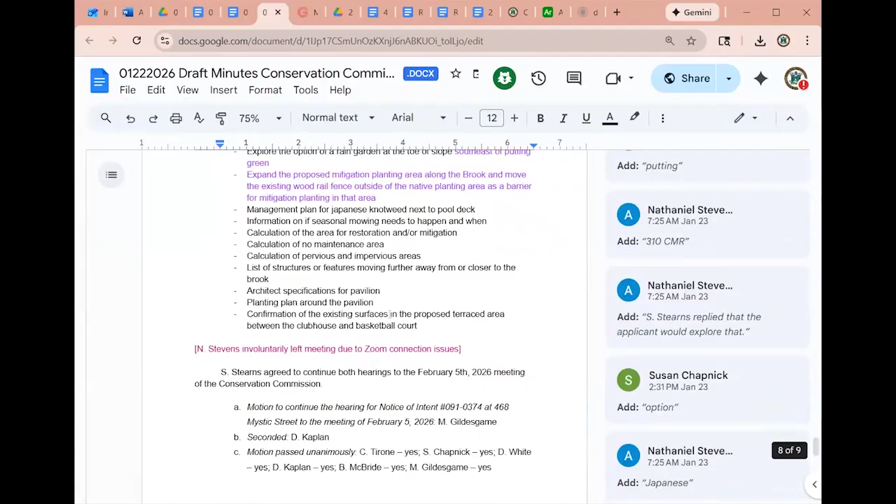And Jackie, if you could scroll back up, because I did have some comments. Were they addressed? Yeah, I know there was one question for Chuck. Let me see if I can find it. I didn't want to kind of go through the whole thing if we had a question that wasn't answered. I think it was near the front. Yeah, where did that go? It's near the beginning. There it is. Oh, ask Chuck. Whoops. Oh, if he is okay with his wording, I'm not sure this is what he said.

I was concerned with the word comfortable, but I mean, if you're okay with that paragraph, I'm fine, Chuck. This was relaying what you said about your conversation with Fish and Wildlife. Yeah. I think comfortable is fine. Okay, yeah, no problem. Right.

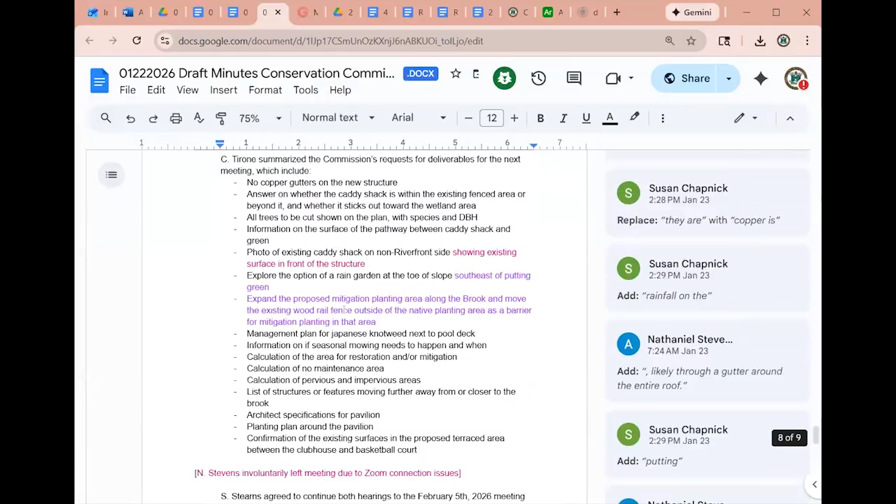So a few changes to the hearings, this paragraph in particular, more details. Then a few additions to this list. And that's it.

Did anyone have any additional comments? So wanted to say thank you to Nathaniel and Susan for all that extra time they've been spending. Appreciate that. Thanks, Dave. Indeed.

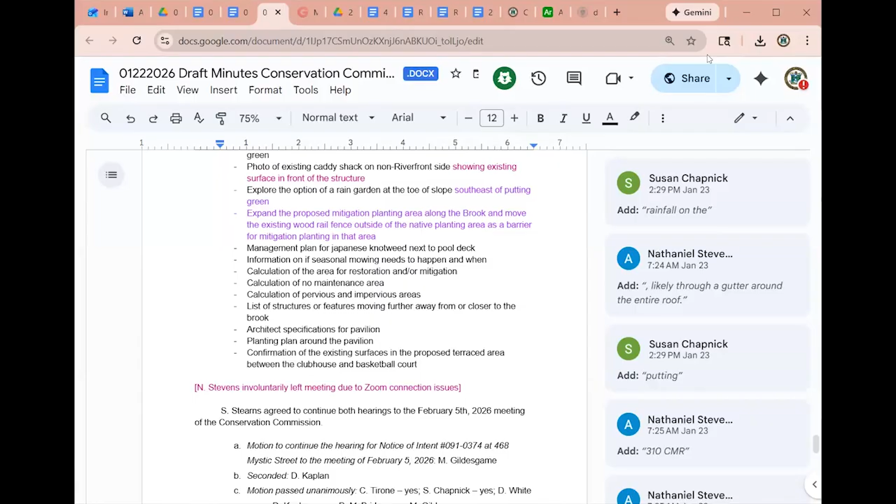All right, so with that, any further comments or motions on the minutes of the 22nd? Motion to accept as amended. Second, Dave Kaplan and Nathaniel Stevens. Mike Gildesgame, yes. Susan Chapnick, yes. David White, yes. Brian McBride, yes. Nathaniel Stevens, yes. David Kaplan, yes. And Chuck Tirone says yes. All right.

So correspondence is available. You can reach out to David Morgan at the office, or you can look at the Conservation Commission link, and we have correspondence there. If you have any issues with that, get in touch with the office, and David will walk you through the correspondence.

So first on the discussion is the vote for chair and vice chair. This is a 2-year term, and it's been me and Susan switching roles here, and we're comfortable extending that for an additional 2 years. But I think then at that point, we would like to, I'm speaking for Susan, but I'm going to say I would like to, hopefully someone else would be able to step in one of these positions so we could roll along.

And typically what ends up happening is we want Susan's position, the vice chair, to be the one that someone steps into, so they have those 2 years of vice chairmanship to kind of get acquainted with the additional duties. So, Susan, do you have anything to say about this?

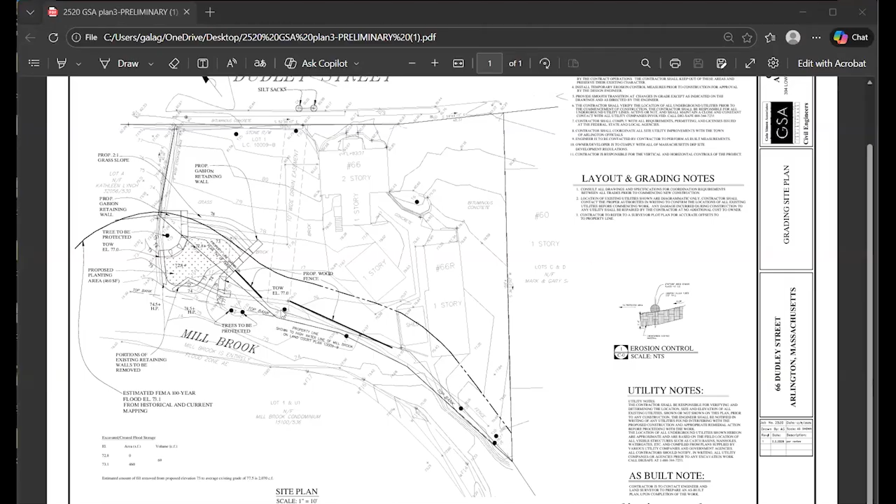One thing I wanted to point out — that dot where your cursor is at the end of the easement, that's a tree that the owners planted, right? I think that's the location. I remember they have it, it is a tree. It's a small tree, yes, it's a 7-inch diameter. There's a name for that tree — is it evergreen? I think, yes, it is an evergreen. Yeah, she had a name for it. Evelyn had a name for it. As I remember, that was planted by their son, or it's like a tree dedicated to their son.

So just out of decency, I would say let's plant around and allow that gap to remain. All considerations about plowing and everything included in my recommendation there, because they're not going to want to plow through their son's tree. And then if they have a true buffer strip, like Chuck is suggesting, from the tree up to the gabion wall, all the better to minimize the runoff and other impacts. So I just wanted to call that to your attention.

I'm not done with this, but Susan, go ahead.

Thanks, Chuck. Just on the talk of the fence — now I'm confused. So is the chain link fence getting removed? Because I don't think we want two fences parallel to each other. Yes, it would. Okay, and I'm looking at the CAD drawing here. I see these little X's — does that mean the fence, the chain link fence, right there, goes up there? So it has to be removed. Yeah. Okay, that sounds good.

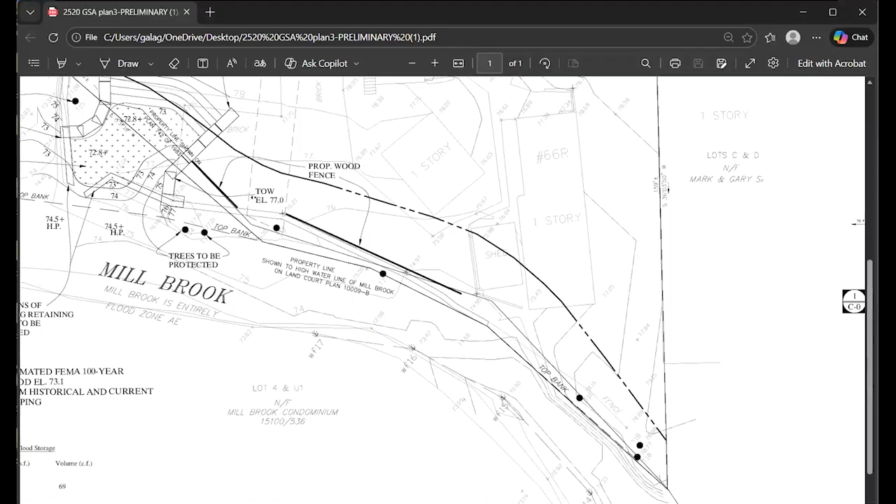I don't see much point in doing it, but the grades here will remain the same, and the water would be allowed to go underneath the fence. My thinking too is to put some vegetated berm on this side, so you have some on the front, some on the back. We'll do some in this area too. As was mentioned before, this is kind of narrow—maybe something can be done, but I'll leave that up to the wetlands person.

All right, thanks, Al. I have one suggestion, and just want to offer a reminder to the commission that the violation included addition of impervious surface, including the patio, and the conversion of the area directly to screen left of number 66 there—that's now a brick parking lot itself.

So bear that in mind as you consider. My suggestion for protecting plantings in front of the fence, maybe there's a granite post or similar, so that there's an obstruction. Just a thought.

No, David, that was—I mean, Al, I hope you're taking notes. All those things need to be considered. I am taking notes. Yes, thank you.

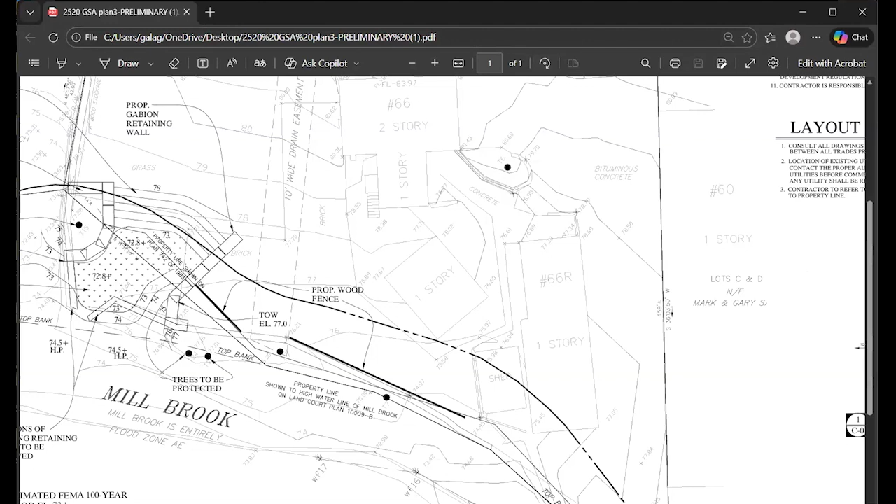Just put the project files up for a second, because I think it's really in Al's hands at this point. We're still at loggerheads with where we're going.

Can I share? I think I can. Do you see it? Yes, there you go. Okay, so the blue areas were where we were talking about planting, and the red areas were where we were talking about disturbance.

I didn't pull up the meeting minutes from this meeting. Let's see, July 11th, '24. I could try to pull those up, but this has been going on so long I fear we've forgotten some of the things we've said.

So the blue area was the planting, or the red area was the planting? Which was it, Susan? I thought it was the blue area, and the red area would be the compensatory flood storage. I think we went out there with the idea that maybe we could just plant our way out of this.

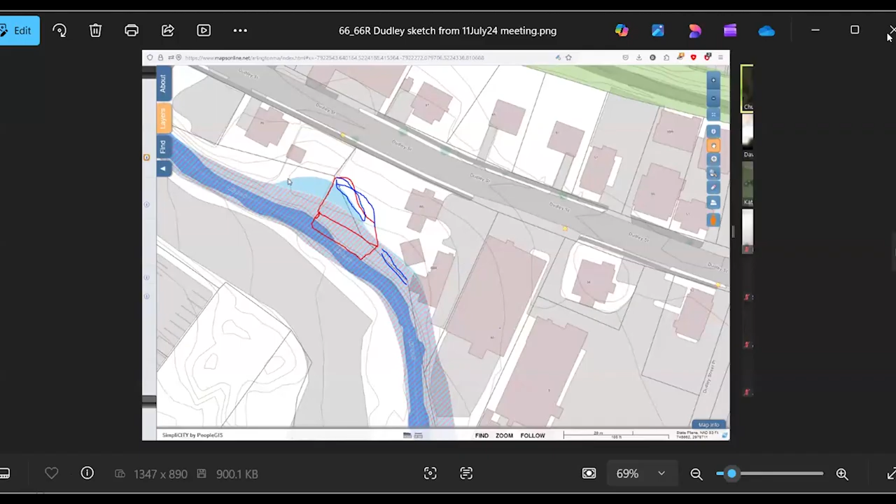Yeah, so okay, that's enough, let's just conclude this. Let me stop sharing. I appreciate what David Kaplan said, but I don't think planting behind the fence addresses future storage area and cars and material parked there.

When we were there, there were plows parked all summer, right up against the bank, and some other things. This is an active site. This guy's a landscaper, I think there's going to be things around, so I'm just trying to create a buffer.

So I'm still stuck on wanting some sort of buffer in front to keep the front of those trucks back a bit, and it would also stop the sediment from going through. But I'm just going to say to Al that we're going to leave this up to you.

You've heard all of this. I'd like to see a plan that has a vegetated buffer strip, and you'd have to justify it because of all the different opinions on this commission. And maybe you might even have to change it when you come back.

So that's it. So as I understand it, you want to be continued for a month. That would be March 5th. And so I heard yes. So can I get a motion to continue this item to March 5th?

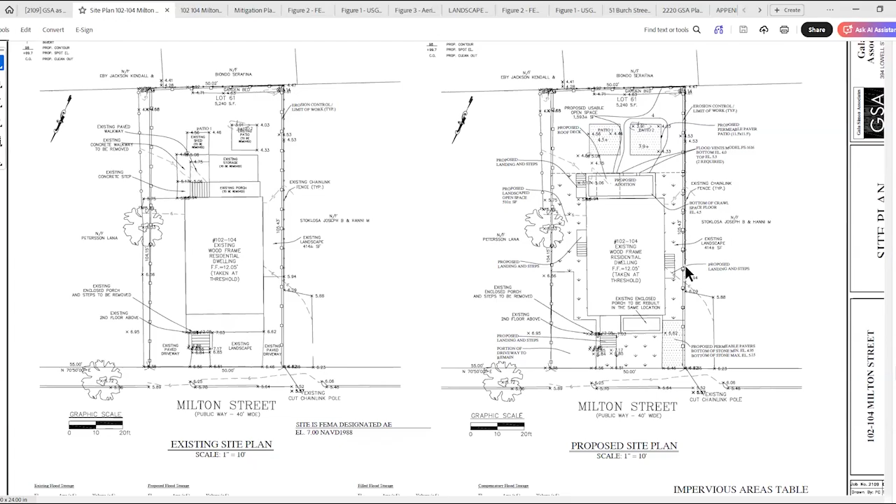They had installed a vinyl fence around the property as they were completing construction, and David noted that it was not in the notice of intent application or on the approved plans. Looking back, he is correct. There was a chain link fence surrounding the property, and Stefan and Albert simply replaced it with a polyvinyl fence. This is the mitigation plan that was submitted with this project, and it shows all of the plantings, but does not indicate a fence. So we had talked a little bit about that.

Here's our mitigation memorandum, and some photographs of the plantings in the back there, and of course the polyvinyl fence. To provide context, this site is in the flood zone, near the outer edge of the flood zone, about 1,200 feet from Alewife Brook. The flood zone elevation here is roughly 7. Here we have the USGS map with the distance to Alewife Brook, here's a scale for context, and the aerial image at a different scale - one is just 200 feet. So the brook is way down here, because you can see all the development separating the brook from the actual project location.

We had talked with David about that. And if the commission recalls, we had also worked with the commission on getting permits for two other projects with Stefan and Albert, namely 14 and 16 Edith Street, and then more recently 51 Burch Street. Both of those sites were also in the floodplain, and those plans actually showed a proposed polyvinyl perimeter fence around the property, and the commission had approved it. So while David is right that the notice of intent and plans for Milton Street do not include the perimeter fence, it is replacing a chain link fence that was there, and we're hoping it's a relatively minor thing, considering the commission has approved such fences on other projects in the floodplain since this permit was issued. I do have the details for Edith Street and Burch Street if you'd like me to get into that as well, but thought I would start the conversation off there.

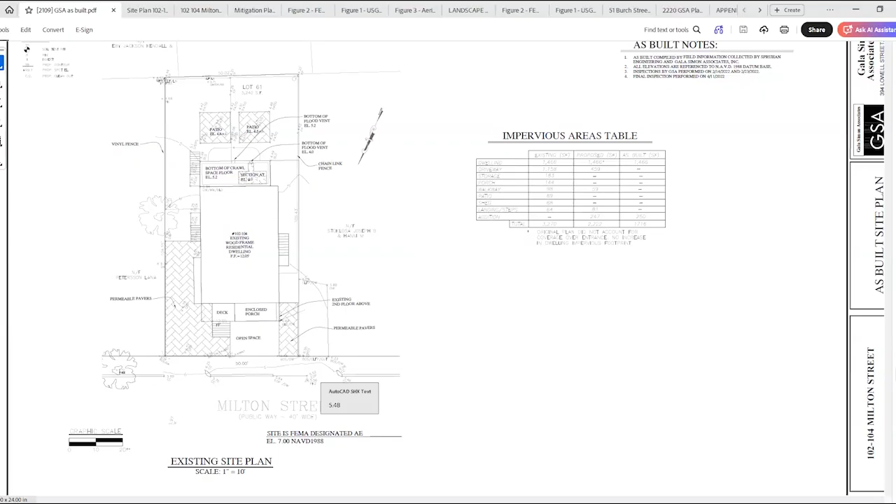Maybe we don't have to get into some other projects. But anything from the commission? I have a few questions, but I just want to see if there's any questions first.

So I don't see any hands. So I'm looking at the certificate of compliance checklist. It looks like it's dated either 1/18 or 7/18. So is it 1 or 7/18? Anybody?

Stefan, you might have to chime in there. I think this is something that our staff fills out. Oh, I'm sorry, I thought you were talking about the request.

So let's say it's 7. I'm going to say it's 7. So this wasn't reviewed just before this meeting. No one has gone out there in 7 months, 6 months to review this. David Morgan, we have not. Okay, so that was my first question.

And then it says on this checklist, 3 years moratorium or monitoring. This is pretty small, so sorry about that. And it says non-compliant, but we're over. How did we get there? Are we 3 years now? Because the planting had gone in, or we're still a little shy of planting? We're good on planting. We're good on planting. So this is in compliance, that we've gone 3 years.

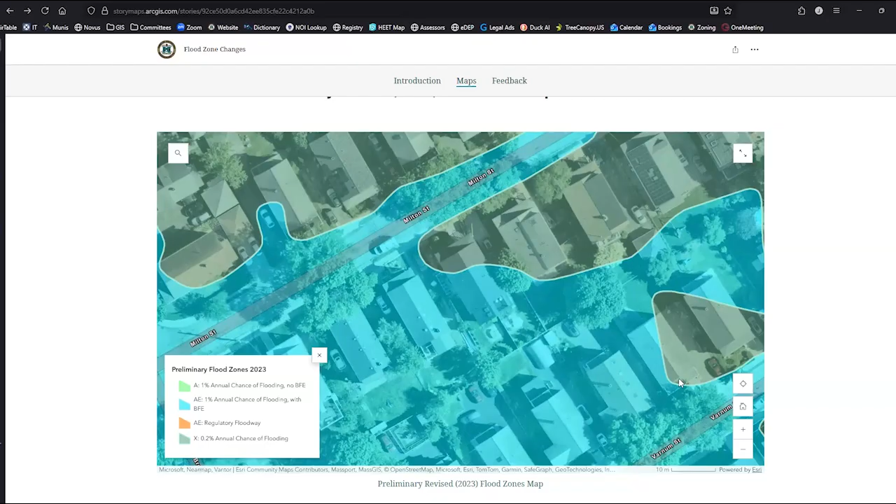Seeing this, I think that even if there is water coming up from Alewife and rising slowly, you're going to allow a sufficient amount of it to enter that small area, so the fences won't have a significant impact on changing where the water goes. Yeah, I also agree it's likely not going to be very deep either.

So, here we are, and I think it's always better to be lucky than good. That installation seems to have worked out, but we never would have permitted that. I think you got lucky and got a little bit of light going through there. I don't want anyone to forget that this was not what we would have allowed. There's always supposed to be a visible gap in every fence. I understand we're far out and all that, but...

Chuck, if I could -- Stefan also understands that for Edith and Burch, the 4-inch gap at the bottom of the fence was specified on the plans as requested by the commission, so they know they need to make sure that exists when they go for the certificates of compliance for those two properties. Yeah, and that's why this was missed on this one, because the fence wasn't talked about. It wasn't part of our discussion, so we weren't able to condition it.

I don't want to -- I like to be consistent, but we went through that on, what was that? The one down on, right, in Kelwyn Manor -- can't think of the name, something park. We let them move the fence. It took forever, so I don't want to go through that again.

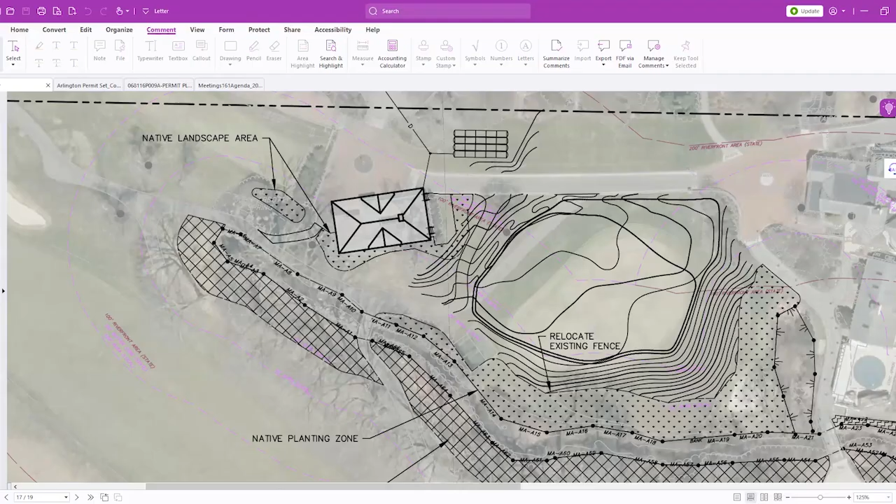Again, a site visit was conducted with Susan, Nathaniel Stevens, Mike Gilderscame, and myself on January 21st, and Sarah was there and others from Beals and Thomas. Sarah, can you again introduce yourself for the record and bring us up to date with this project?

Yes, thank you again, Mr. Chair. For the record, Sarah Stearns with Beals and Thomas. My colleague Matt Cody, PE, is with me, as well as members of the club staff.

What you see in front of you is part of a package that we submitted to the commission last week, summarizing what we talked about last time. The way we broke it up, just to try to stay somewhat organized, is by different scope items - we have a section on the Caddyshack/social pavilion, the putting green, and then the clubhouse addition, just to organize it in a somewhat logical way.

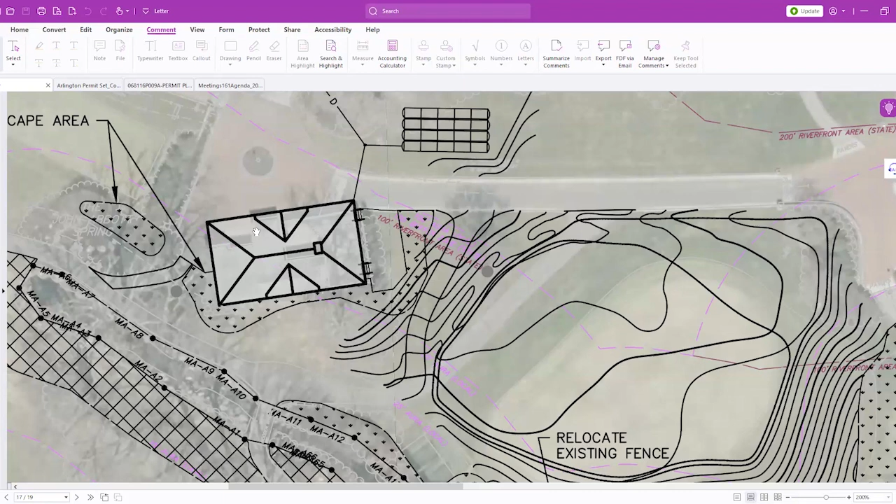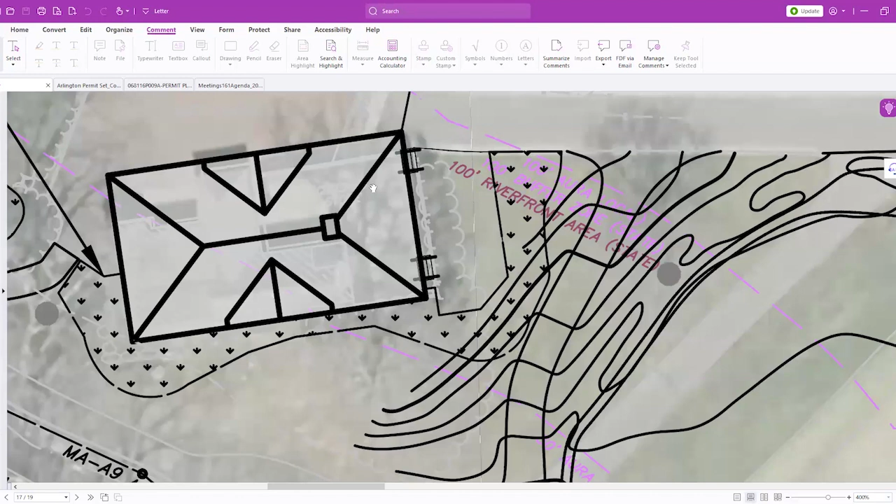The social pavilion, current caddy shack - the proposed roof is overlaid on the existing caddy shack, which is impervious other than the right-hand side, where that gravel picnic area is under a tent. That's really the change in impervious area for the proposed social pavilion, because that would become fully under the roof line, covered, so that's impervious area. Yes, that is going to be an increase in impervious area under that section, and that's calculated into the stormwater management. We're holding the line of the existing building at the closer edge to the stream as it is today, not getting any further.

So there is a small increase in impervious at the pavilion. The upside is that there's a ton of planting and the roof line will be captured in a stormwater management system, whereas it's not captured at all in today's system.

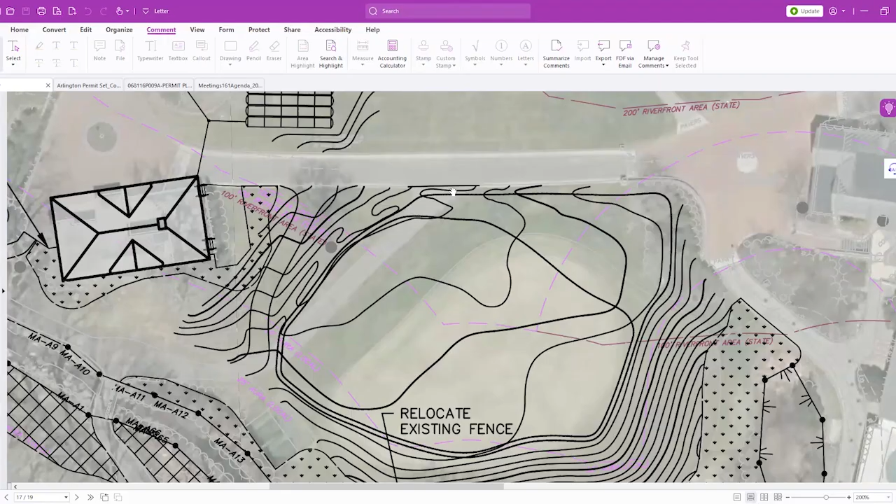At the putting green area, you can see there's an existing paved cart path that under the new putting green layout gets removed and replaced in a smaller footprint to the left. So there's a net loss of impervious area in this area, and we've calculated that in as well.

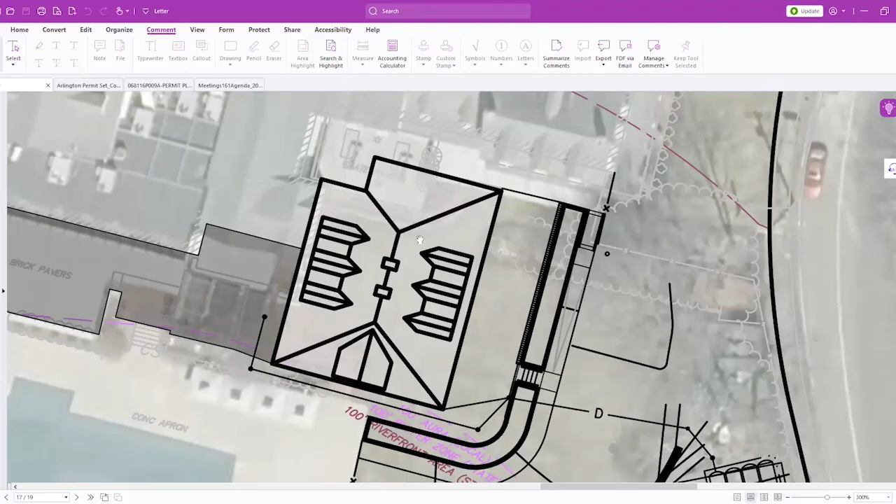Shifting over to the clubhouse addition - it's proposed partially over existing impervious area, but also over existing maintained lawn. So this area is an increase in impervious area from what it is today, and again that went into the stormwater calculation.

I think that's it for impervious versus pervious in terms of the new proposal. What is the total increase in impervious surface? I believe it's 4,800 square feet total. In Arlington there's also a small increase in Winchester, but in Arlington it's 4,800.

Is that all within 200 feet of the riverfront? Looks like it. It is, yeah.

I mean, the whole entirety of the clubhouse you can see is in the 200 foot. Okay, so everything that we're talking about today is in Riverfront, predominantly in the outer 100 feet.

In the outer part, we're meeting the 2-to-1 mitigation mainly with plantings along Herbert Brook and some around the putting green. So the planted areas at the pavilion and at the lower end of the putting green alone meet the 2-to-1 impact mitigation ratio.

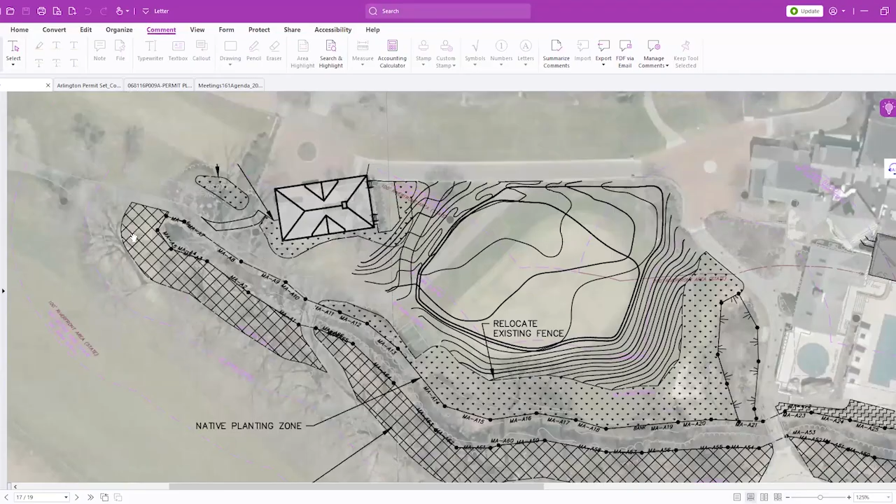So up by the culvert, that's an area that gets mowed once a year, and then as you go downstream, that's largely hands-off today. So you're proposing now, moving forward, to no longer mow that once a year. It'll just be allowed to rewild, and I believe that was the agreement.

I think Blaine Doherty is on still, the club superintendent. If it's okay, Mr. Chair, for Blaine to weigh in as the groundskeeper, he's probably the better person to respond to the specifics than I am. Sure, Blaine. Yes, we have agreed not to mow that area, going from mowing it once a year to zero times a year. Okay.

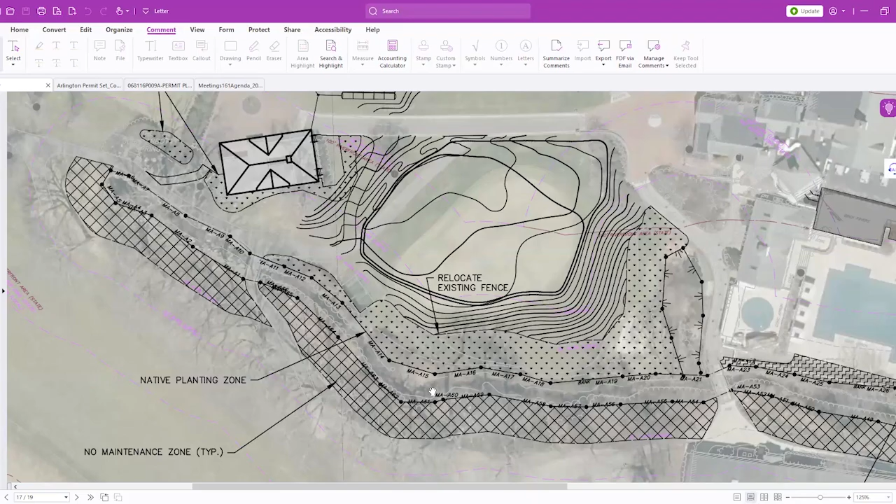All right, so I guess just for that area, if all the other areas you're basically just codifying what you're doing already, and that is a pretty visible area. I mean, it might be a good idea just to see what's coming back.

It's kind of an edge habitat, you know, when you have signaled that you'd be interested in helping manage the knotweed, but I guess, you know, if you could have some sort of monitoring plan, and if it does just turn out to be a bed of invasives, that's what comes back. I'm not necessarily proposing that be a planted restoration area, but I would hate to see it come back in a way that's aesthetically unpleasing to you, but also ecologically impactful.

So is something like an informal monitoring plan, and if there are invasives, maybe you can come back to the commission in 5 years or something and let us know, and we can help you figure out what to do with that space if it becomes an eyesore for everybody.

So we did include with our submission last week a proposed invasive species management plan. I guess I was thinking that would just cover that knotweed space. One of the things we had talked about, I believe, at one point along the way is no maintenance in this zone other than kind of scouting and keeping an eye out for invasives.

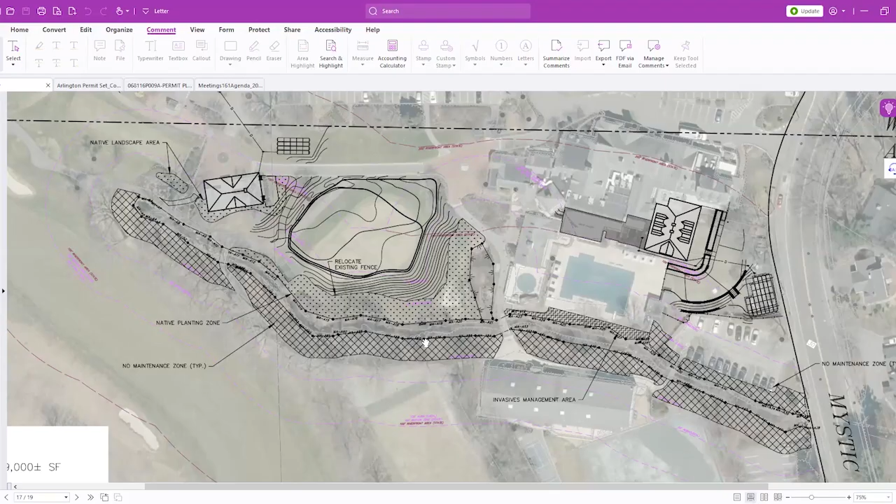Any other comments? Are we ready to - oh, I should ask if anyone's here attending tonight's meeting who has any comments about this project. And if you do, please speak up, turn your video on, or use the raise hand function to let us know that you would like to speak.

We're the last one standing, Chuck. Well, I have the big plan in front of me, but that was good - I thought you were someone, I was like, oh, here's somebody.

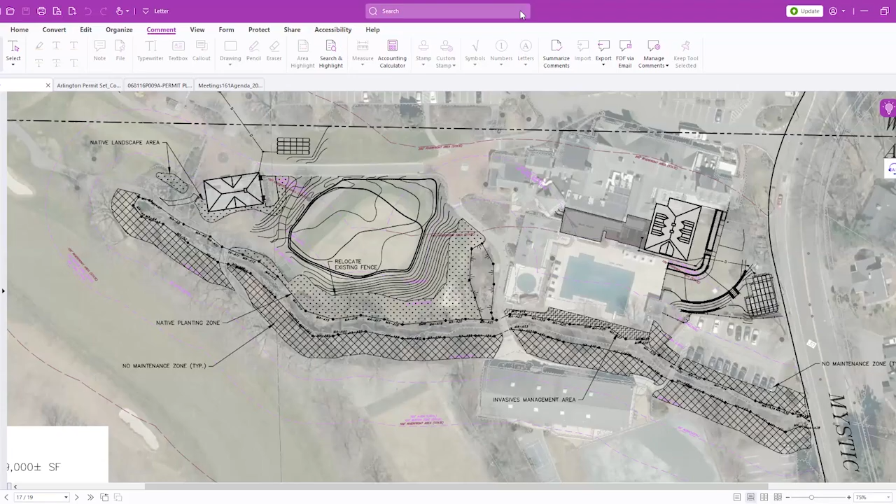So given that, we need permission to extend this to - who do we say, the 17th? Can't remember what that date was. That's the next meeting. Do you think you'll be ready on the 19th?

So yes, what I'd like to do is for both of our notices, prepare our planting plan, submit revised stamped plans that feel final to us ahead of the next meeting. We can do that within the next week and get that to the commission, so you have plenty of time to review and hopefully discuss closing at the next meeting. So yes, February 19th, I think it was, Mr. Chair, and we agree.

Great, okay. I just have a procedural suggestion - the more I think about this, I think it would be better to have one plan for both projects, especially for the mitigation. Thank you for bringing that up, that is what we're going to do. Tell me what you think about this - just to have everything in one place, but clarify which projects are under which DEP file number.

Yeah, have a chart or something on it. You could do like A is everything for the first one, and B the little baby one - the tree planting plan, something like that. Show it in a different hatch pattern with the DEP file number, whatever. We can show the remainder as a screened pattern, lighter gray or something like that, and then for the other DEP file number, just do the reverse. That way everything is captured on both, particularly for the larger project - I know that's kind of the meat and potatoes of this whole thing, but not to lose sight of compliance on the other project as well.